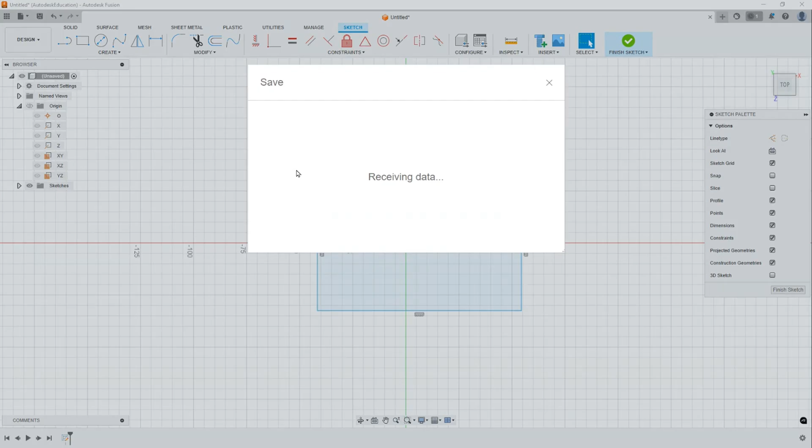So, if you hit R, it's actually rectangle. I'm going to left click here, and left click here. Again: R, left click here, left click here. I did not input any dimensions or values. Notice the color of this rectangle is blue, and it's actually loose. If I select this point or this line, I can move it around. Gets, sir, ma'am?

Later, we will be sharing more resources. I'm sure some of you have created designs in AutoCAD. You can reuse that, you can bring AutoCAD into Fusion 360. So, we've made a rectangle, and I'm going to hit E right away. What does E stand for? E is extrude.

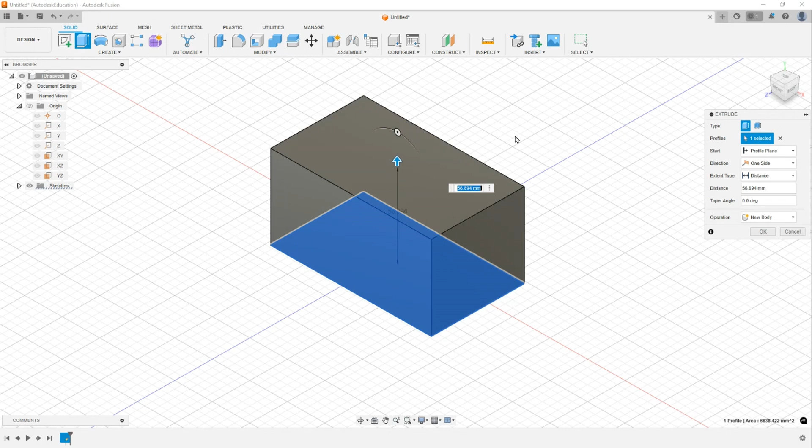Now it is asking me, notice it has an arrow, what would be our preferred distance or height of extrusion. No need to be exact, I just want you to create a box. Sa akin, 52, 59, 56, up to you. And then I'm going to hit OK. So as quick as that, we have created a 3D model from a 2D sketch.

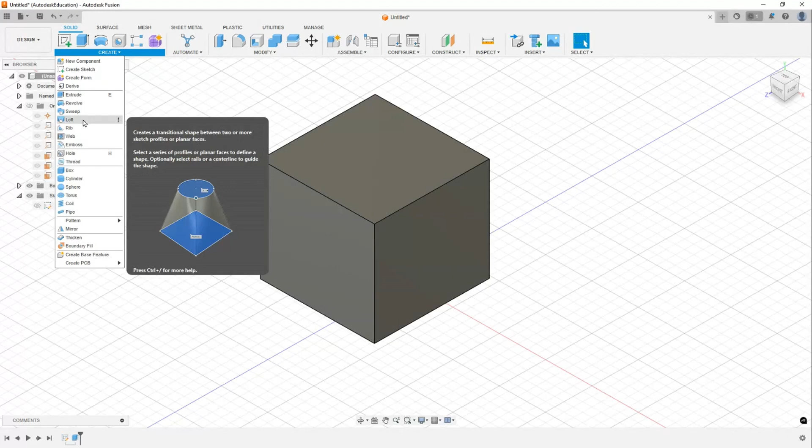Let me go over to our browser tree, right-click, edit sketch. This is the one from earlier. I will adjust this to this size and finish sketch. It automatically adapted. So again, we came from 2D to 3D. Most of the commands, extrude, revolve, sweep, loft, are all dependent on sketches. So, napakahalaga ng sketch.

For me, the definition of sketch is mabilis kang magdo-drawing. Mostly ganyan sa workplace: the boss draws on paper, gusto ko ganito, this size, these dimensions. Then it's up to you as the designer how to bring that into the CAD software. So stick to the definition that sketch is mabilisang pagdodrawing. What I showed you earlier all began with the sketch, then we extruded it.

Okay? So, next. Yes, Sir Ronimar. Thank you for joining us.

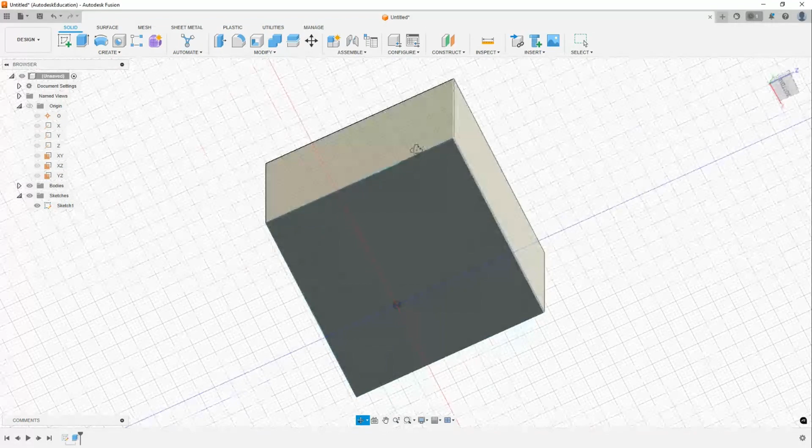So, next, paano ba siya, how do you rotate, pan the object? Okay, so actually, it's the same as AutoCAD. So, di ba, if I roll the scroll wheel, sobrang layo na niya. And if I double click the mouse wheel, it zoom extends. If I hold the mouse wheel, I am panning the model. And if I shift and hold the mouse wheel, I am rotating the model.

Okay? Shift and hold the mouse wheel. I am now rotating the model. And I want you to also pay attention to the upper right. So, let's just call this Bahay ni Kuya. So, if I select Bahay ni Kuya, it reverts to a standard isometric view.

Also, very prevalent among Autodesk softwares is the view cube. So, in 3ds Max, Maya, AutoCAD, Inventor, this is very familiar, the view cube. So, if I want to view the top view. I can also select this curved arrow to rotate the model. Select these small triangles. Go back to home view, select this corner or this corner. So that's another way of rotating our model.

So I would like to give you a few minutes. Sige nga. Play around. Be familiarized on interacting with the model. Okay, so hoping you are familiar na.

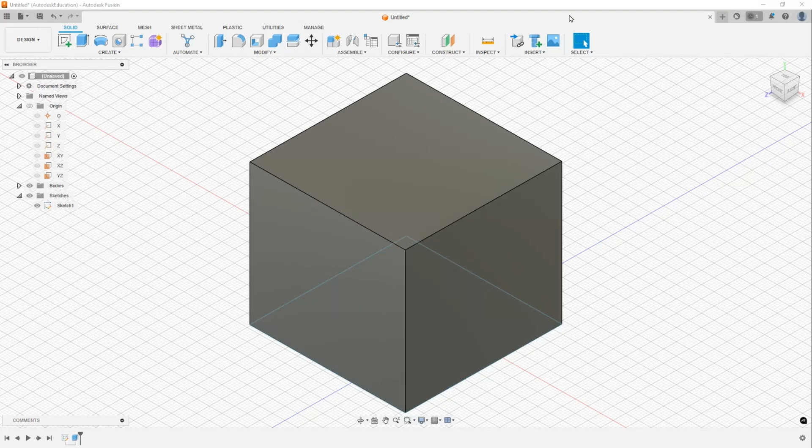Next one naman. I want you to hit Control N. This time, I want you to be familiarized naman with constraints. Okay, let's start slowly. Guys, I want you to select Create Sketch. Sa mga nagfa-follow along, I want you to select Create Sketch. So, kanina, we hit R, and it goes directly to sketch mode. So, this would be the basic way. I selected Create Sketch on the upper left.

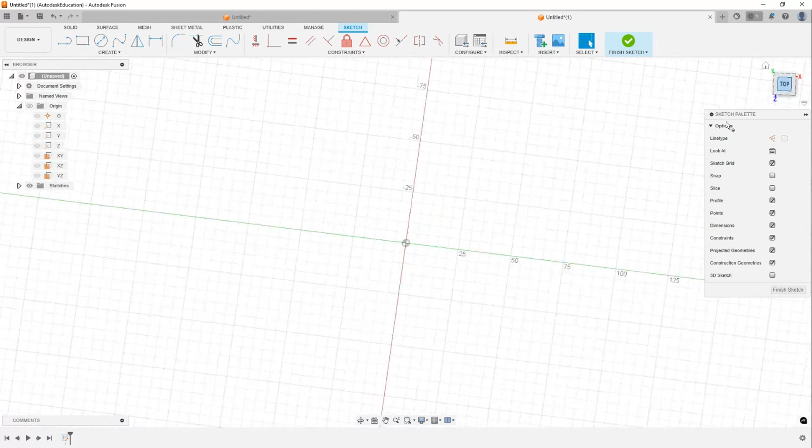Ngayon, tinatanong niya, saan natin gusto magsulat? So, for me, I prefer sketching again on the XZ plane. XZ plane. Okay? XZ plane, guys. So I'm currently utilizing the view cube to go back to my preferred view. Okay.

Next, ito sunod na gagawin nyo guys. I want you to hit L. Okay, I want you to hit L. So L stands for line.

Also, before we begin sketching, another preference. I want you to disable dito sa grid and snaps at the bottom. Personal preference lang naman, or of course, depende sa design situation. I want you to disable snap to grid and incremental move. Snap to grid and incremental move.

Okay, hitting L again for line. To disable line, of course, same with AutoCAD, L, escape. Line, I hit escape to get out of that command. So L again. So I want you to create a line here, left click, left click, left click, left click, double left click. Sige nga. Again. Left click, left click, left click, left click, double left click.

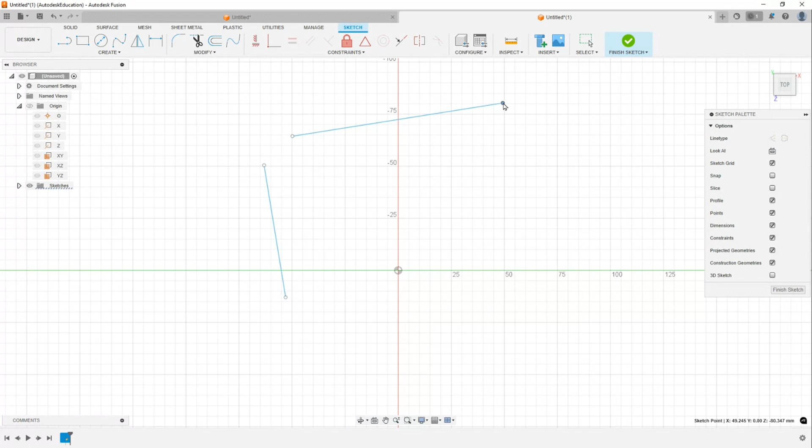So now, etong line na to guys ay wala pang constraint. Pero if we go near to a certain position, tingnan nyo, nagsasuggest siya ng horizontal constraint. So, ibig sabihin, na-apply na dyan yung horizontal constraint. So, pag minumove ko siya, Sir James, Sir Sean Kevin, siya ay perfectly horizontal na. Pero to remove that constraint, I can select this constraint, hit delete. So, pwede na ulit siyang diagonal.

Okay? So, reapplying horizontal, vertical, discover natin to. So, ito naman, because this is leaning towards vertical, if I apply a vertical constraint here, automatic, magiging vertical siya.

Ayan, di ba? So, alam na natin na ang horizontal vertical constraint ay also applies to lines. So, as we progress, madidiscover nyo na hindi lang pala na-apply ang constraints to just mere lines. It can be applied to other entities as well, object entities, sketch entities.

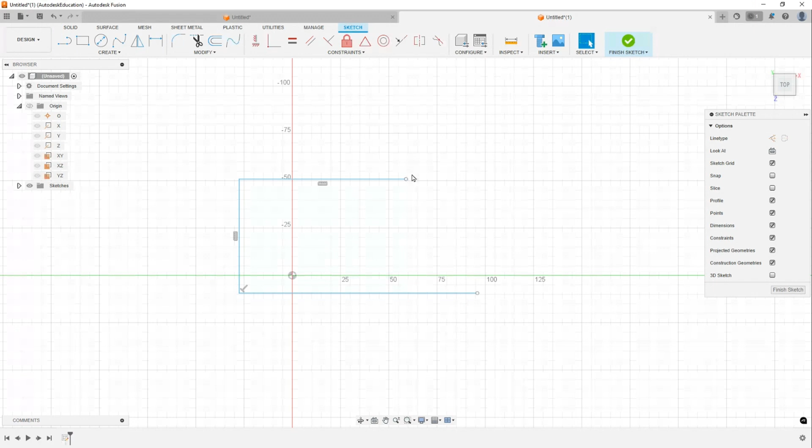So next, I want you to create another line. Dito naman. From this end point to this point. Okay? Ayan. Ito yung ginawa natin bagong line.

Ayan. Hi, Sir Jericho. Hoping you are following along.

Okay, so gumawa ako ng line. Nakadikit, guys, ha? Nakadikit. It's coincident. Next, I want you to select equal. Ayan, I have selected equal. Selecting this line, tsaka this line. So, ang ginawa niya, di ba? These two lines are now equal in length. Okay? Equal in length. Next, I want you to hit C naman. Circle. Gawa nga tayo ng circle dito at saka dito. Ayan.

Ayan. Sir Jericho, pakigawa nga din to. Ayan. Thank you.

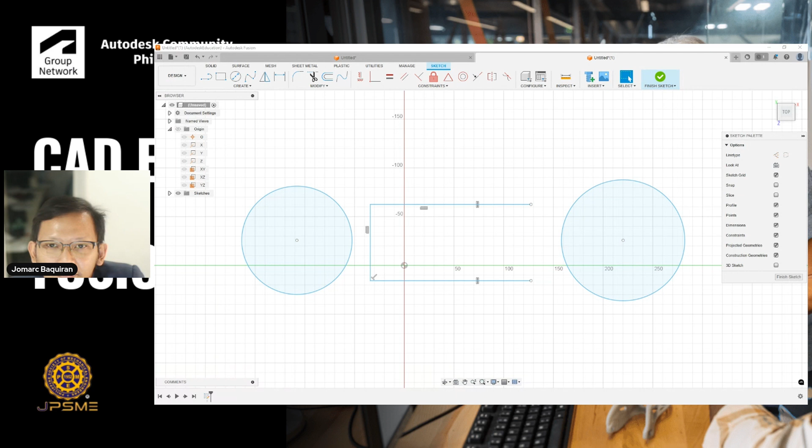Ayan. So, ito na yung current status ng sketch. Meron dalawang circle, tsaka itong 3 lines. Okay?

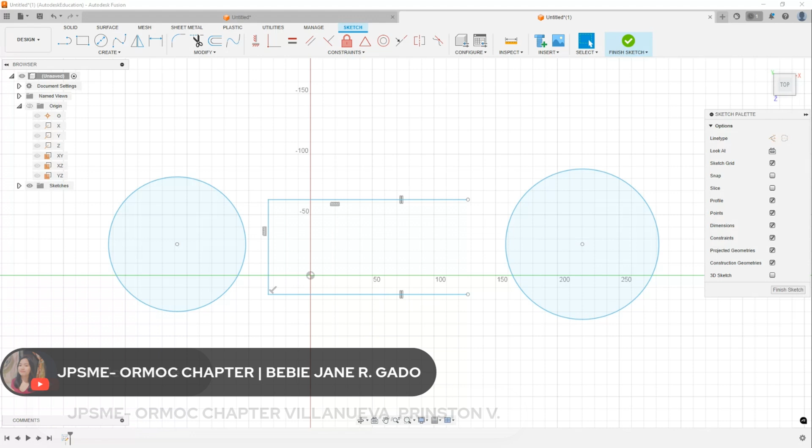Okay, going back. Kanina, 'di ba? Inequal natin tong dalawang line na to. So, hindi lang siya, of course, lines, 'di ba? We can also have these 2 circles equal. So, selecting equal. Selecting the circumference and the circumference. So, equal na siya, 'di ba? If I resize the diameter of the circle, dahil equal sila, so pareho. So it also applies to arcs, lines. Pag sinelect mo equal, magiging equal na sila, pareho. Okay, gets? Gets.

Next, parallel, of course, obvious. If I create another line here, di ba? Ito, line there, tas line din dito. I want these 2 lines to be parallel with each other. So, selecting parallel. Selecting them both. So, parallel. Diba? So, kung mag-extrude ako ng bubong, gagawin kong parallel yan. Ito, tsaka to. Parallel. Okay? Gets what parallel is? Yep.

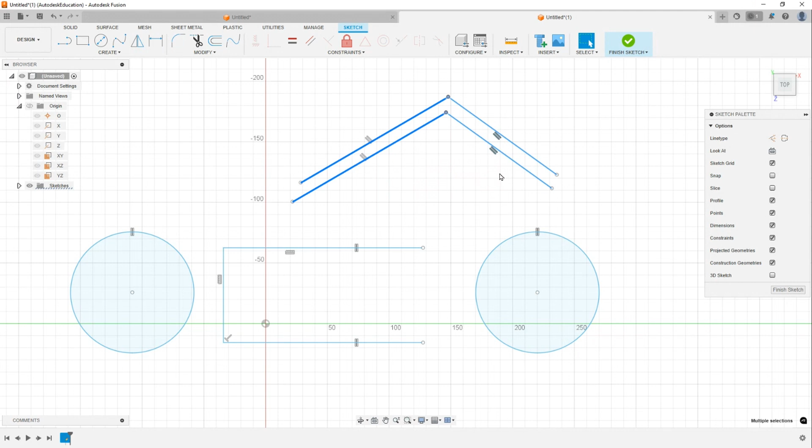Okay, next, perpendicular. Of course, ano ba yung nakikreate natin na angle pag perpendicular? It's obviously a 90 degree. So, kapareho dito. Although, etong dalawa na to ay walang perpendicular constraint. This is actually perpendicular too. It just so happened na nag-coincide yung dalawang perfectly horizontal and vertical entities. Pero dito, it was applied. So, there are instances na pwede ka makapag-create ng perpendicular na situation, pero hindi perpendicular constraint ang ginamit mo.

Okay? So, again, creating another line here and then applying perpendicular. Ito tsaka ito. Of course, the angle created here is 90. Ayan, perpendicular. Gets? Okay. So, fix, of course, finifix lang naman yan. Depende ulit sa use case, but mostly this is not utilized.

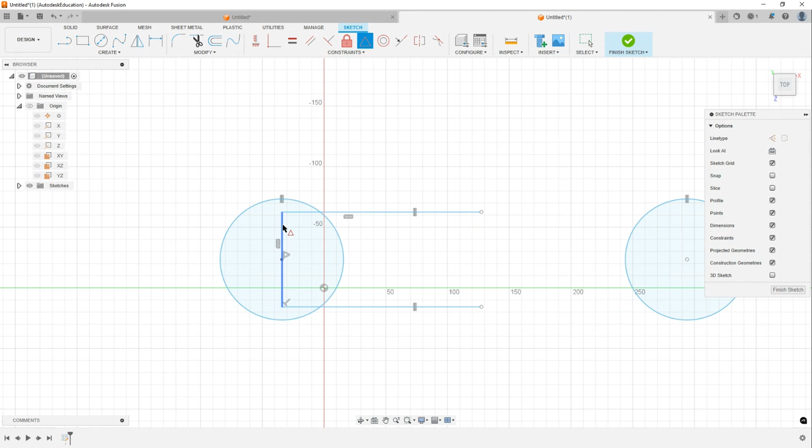Midpoint. Okay, midpoint naman. So, ang next intent ko is I want the center point of this circle to be at the midpoint of this vertical line. So, selecting midpoint, notice po itong center point na to mapupunta sa midpoint ng vertical line na to. Hitting escape. Ayan. Nasa midpoint.

Same din, kunyari. I have a line here and I want this endpoint to be at the midpoint of this line. So, selecting midpoint, selecting this and this. Diba? Tinuhog na niya yan dun. At the midpoint. Of course, indicated by a triangle.

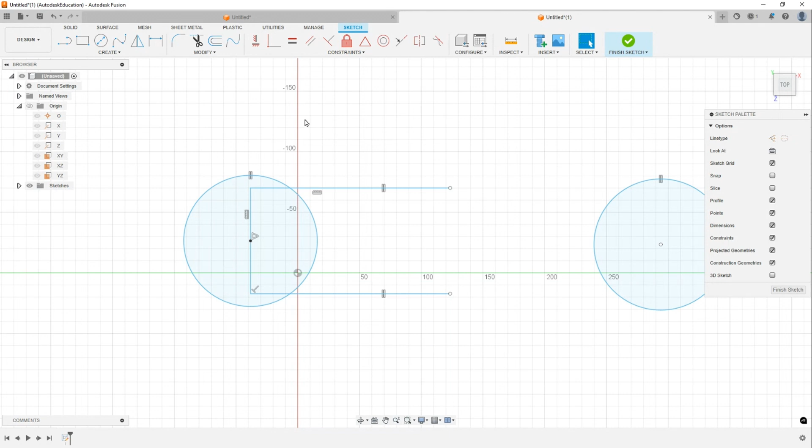Ayan. Okay, midpoint. Diba? It's simply the point going to the midpoint. In this instance, a line kanina. Okay. Ngayon, I want this horizontal line at saka itong circle na to. Diba? I can also select coincident. Select nyo nga to, guys, tsaka itong end corner point na to. Yan, corner point na yan. Select ko yung circle tsaka itong point. So, actually, ang another effect na nangyayari dito ay tangent na siya. Ayan. So, pinagdikit natin guys, ito na yung status ng ano natin.

Next. Line. Isara na natin to. I want you to create a line from here all the way here. Double left click. So, yan na. Okay. Next. I-midpoint na rin natin. Diba? I-midpoint natin tong center point at saka tong vertical line. Center point, vertical line. I selected midpoint.

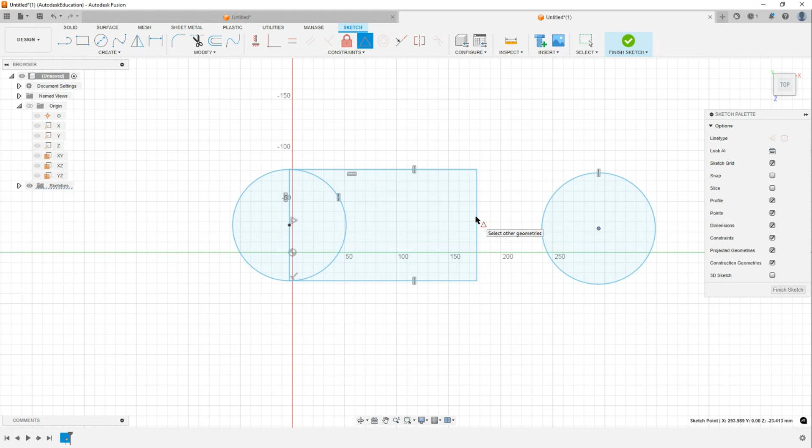Ayan. Sir Noren, are you following along? Sir Noren Kalika. Hoping you are following along. Okay.

So, gets? Yan ay nagawa natin. Let's create another circle nga, mas maliit. Ayan, I created 2 circles po. On the right, on the left, mas maliit. So, next naman ay, let's discover concentric. So, pag select ko circle na to, at saka circle na to, diba? Actually, the effect is both of their center points ay naging coincident. So, concentric, selecting this, tsaka this. Again, concentric, selecting this and this. Selecting the 2 lines. So, ito na yung current status ng ating sketch.

Okay. Angel May Rosalejos. Message mo rin ako, ma'am, ha, sa FB. Okay.

Next, collinear. Gawa ko ng dalawang line dito. Ayan, collinear. Okay, so selecting collinear, applying collinear constraint to both of these lines. So, ginagawa niya simply collinear, pinagpapantay, di ba? Okay? Collinear.

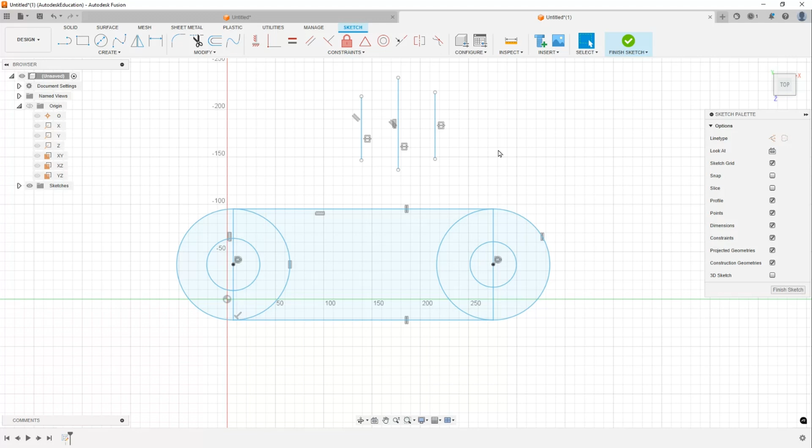And lastly, symmetry. So, gawa ko ng vertical line here. Double left click, double left click, double left click. So, when it comes to symmetry, ang first step dyan, select natin itong dalawa na nasa labas. Kasi, my intent is to have the last selection to be the symmetry line. So, if I move this, parang equal din siya, guys, diba? They are symmetrical. So, same distance from here to the symmetry line. Okay? So, there are instances na may i-revolve kayo. You will utilize the revolve feature. It can be possibly through a symmetry constraint.

Delete ko na, ha? Next, my next question is, nasaan ang geometric center ng ginawa natin na to? Hindi ba actually yung pinakagitna nito nandito? Nandyan, somewhere dyan. Tapos, ang ating 0, 0, 0, ang origin natin ay actually nandito. Ayan, I turned the visibility on. So, I want you to be in the habit na, as much as possible, if symmetrical yung ini-sketch nyo, ilagay nyo sa gitna yung geometric center, i-coincide nyo with our origin. So, ito yung origin. Which means, i-move natin tong sketch na to papunta dito. Coinciding with our center point. Yung X, Y, Z.

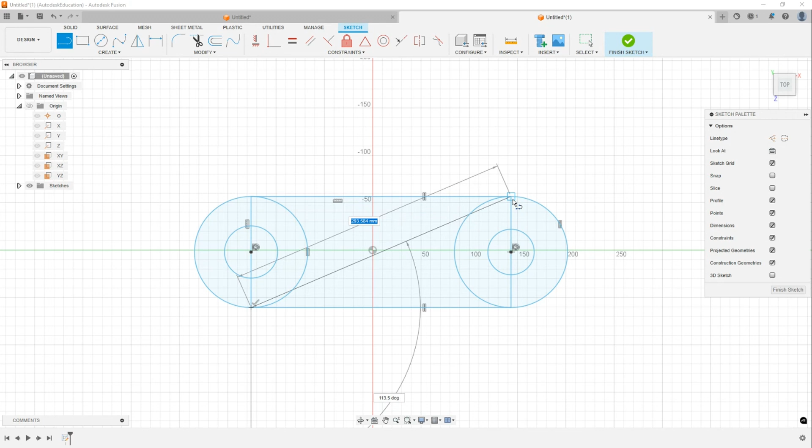Okay? Ngayon, the next step, paano ba natin gagawing gitnang-gitna? Perfectly at the center. So, one way I am seeing is I'm going to create a line from here to here. Tapos apply ako ng midpoint. Midpoint neto coinciding with our origin. So, gitnang-gitna na, diba? Okay?

So, delete ko siya. Another way is, select ko yung horizontal, vertical. I-hold ko yung shift. Guys, again, i-hold ko yung shift. Nag-hover ako sa horizontal line. Nasa horizontal, vertical constraint tayo. Pag in-hold ko yung shift, nag-appear yung triangle, diba? So, it designates this is the midpoint. So, holding shift, left click. Tapos, left click dito sa origin. Again, holding shift, left click doon, tsaka left click dito. So, sinasabi niya, yung midpoint at tsaka origin ay perfectly vertical na.

So, it is not applicable to lines only. We can do horizontal, vertical through points. We can align points horizontally or vertically. So, same din. I will reapply. I will grab horizontal, vertical, selecting this center point, tsaka our origin. So, we had the same effect kanina instead of creating a diagonal line. So, hindi ba mas malinis yung ating sketch ngayon? Okay?

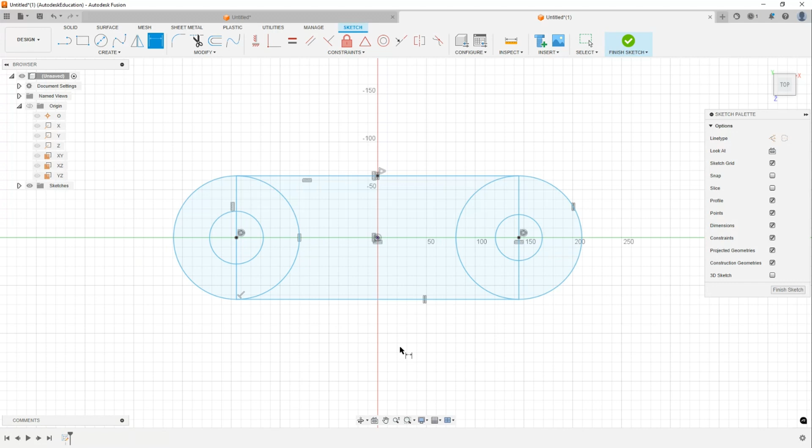Gets? Yep. So, next, diba? Let's apply dimensions. So, hitting D or dito sa upper right, sketch dimension. Select natin itong center point at center point. I prefer 100.

Ayan. Also, very important, diba? I want you to head over to your profile. So, this is my account. I'm going to Preferences, Design, okay? And I want you to enable this, scale entire sketch at first dimension. Enable nyo nga yan, guys. Apply, okay. Ayan. So, 100.

Next, itong outer circle natin na to, how about 50? So, kanina blue, diba? It now turns into black. How about this naman? To 25? Okay? And, hindi kasi natin na-apply yung equal sa dalawa na to. So, let's now apply equal to these two inner circles. Equal this and this. So, from blue, itim na siya.

Kasi we have defined the right constraints. And we have added values. We became specific to the dimensions. Ang gusto ko 100 to. Diba? Ang gusto ko diameter nito 50. Yung inner diameter nito 25.

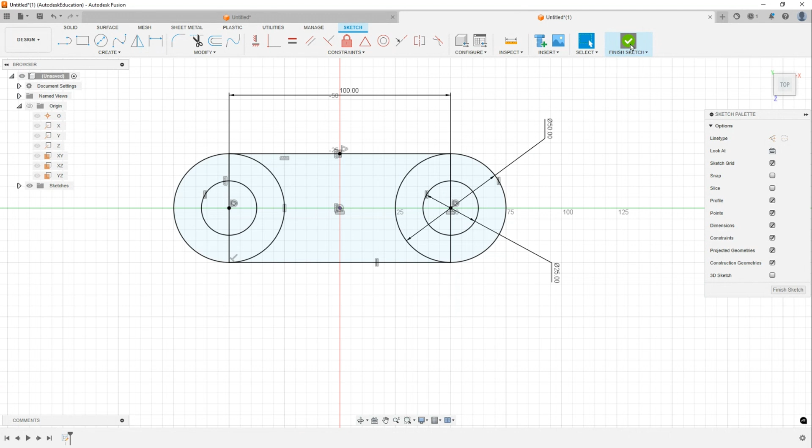Gets? Okay. So next, I want you to select Finish Sketch. Punta sa bahay ni Kuya. Select Extrude. Okay? Create a window selection. Tapos, I want you to select Symmetric. Why? I-maintain ulit natin yung position ng ating origin. Diba? So, if I head over to front view, ito yung ating origin. So, symmetrical, na-maintain na nasa gitna.

So, I want the whole length siguro 10. Ang thickness nito overall, 10. Ayan. So, thickness 10. If I select this edge, sa bottom right, nakalagay naman 10 millimeters. So, if ever iba yung units nyo, head over to Document Settings. Tapos, Change Active Units. Set this to millimeter. Although preference lang naman.

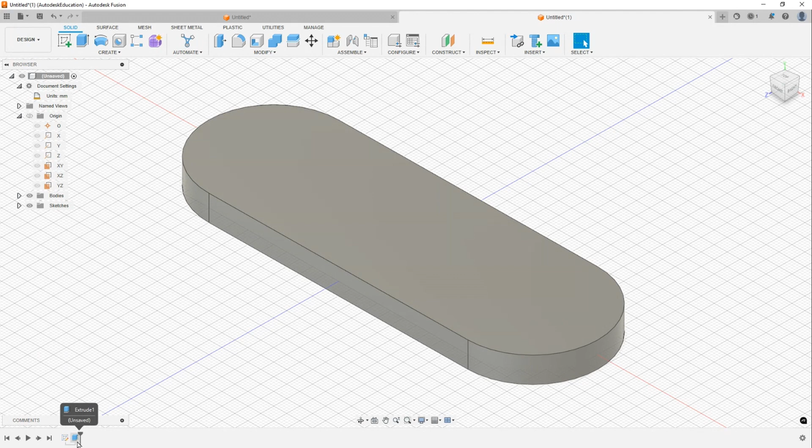Next, lagi naman sa design, of course, may changes, diba? It may be changes from the customer or changes from your boss, requiring you to revise this and that. Let's say there's a revision requiring us to put holes pala. So what we can do, head over to our timeline. Sa ilalim po, bottom left. Right-click, Edit Feature.

Tapos I want you to hit Control. Control left-click dito para i-remove yan. So 8 na lang. Kanina 9 tong profile selected. Control left click ulit. Control left click. So, may butas na siya. Okay? So, select okay. Sige nga. Ayan.

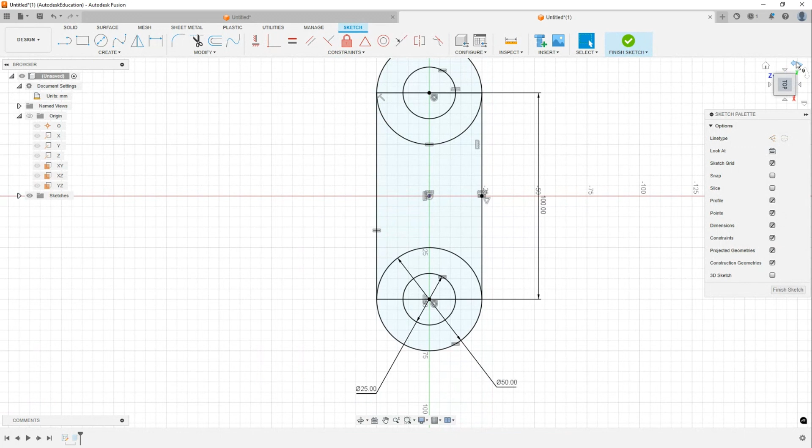Tapos, let's say, may update na naman. 'Di ba? Let me head over to Edit Sketch. I-rotate ko to, dito guys, sa may View Cube. Let's say, there's an update. 110 lang dapat daw, hindi 100. So, finish sketch. So, again, it automatically updated.

So, this is just a simple part, 'di ba? Hindi pa to complicated kapareho ng plastic part, plastic component. So, in the future, mas lalo na kung plastic, dadami yung mga features registered here sa ating timeline. So, for now, ang nakikita lang natin ay isang sketch at isang extrude.

Okay? So, I want you to screen capture. Ayan, snipping tool. I don't know ano yung sa inyo. I want you to screen capture this. Ayan, sige nga. Yep.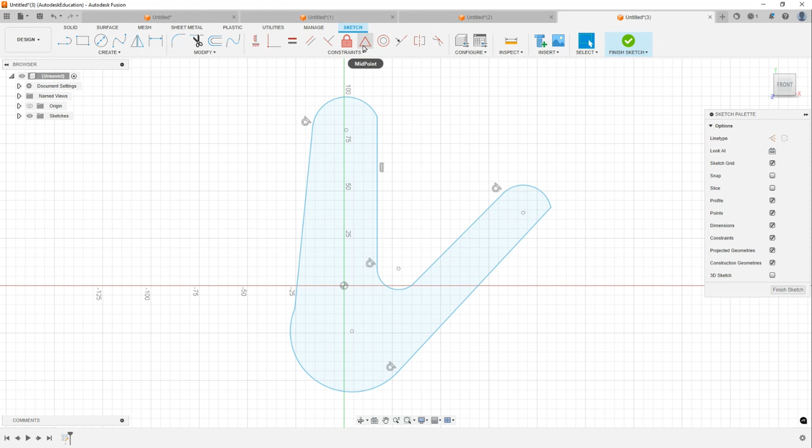So, of course, ito nangangailangan ng mga constraints like for this one. Ito obviously needs to be coincident. So, selecting these two points. So, dikit na siya. Notice itong may tangent constraint. Smooth yung transition ng line tsaka arc, which means I'm going to apply tangent din to this line, to this arc, to this line, to this arc, to this line, to this arc, to this line.

Okay? And actually, it has a construction line. Gagawa ko ng construction line from this to this. Double left click. From this to this. Tapos, diba ito? This one should be coincident with this point. So, coincident. Select ko tong center point na to at saka tong our XYZ origin. Diba? Move ko to. Resize.

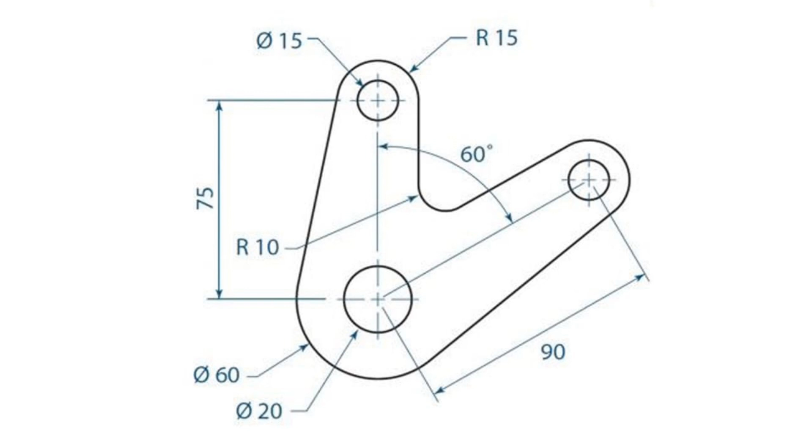Okay. Ito yung progress ko sa ngayon. Next, our fourth challenge naman. Again, requesting everyone to screen capture this. Ayan, pa-screen capture.

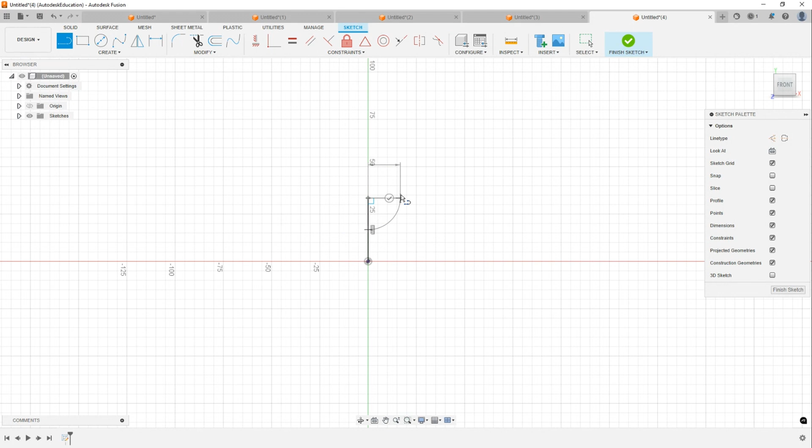Ayan. Okay, sana na-screen capture nyo na ang ating fourth exercise. So, ako, my interpretation on this is I'll be hitting R or L. L, sige, L. Again, going back sa ating definition ng sketch, mabilis na pagdodrawing. Release. Ni-utilize ko ngayon yung holding the left mouse button. Left click, double left click. Ayan.

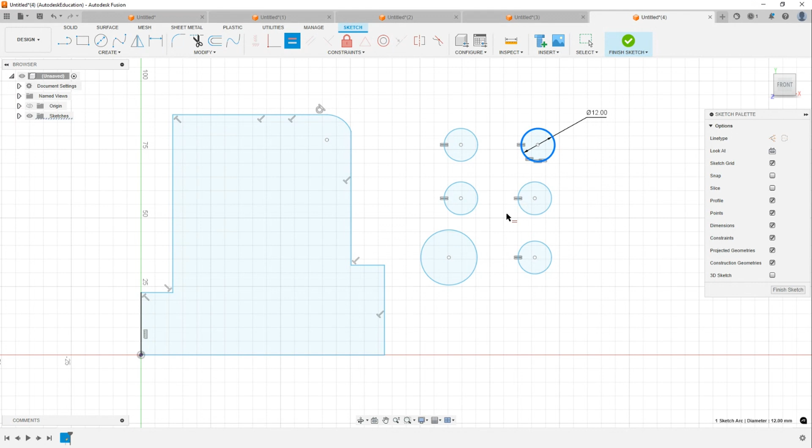Nanay, anak. Nanay, anak. Nanay, anak. So if this becomes 15, automatically mag-update din the rest. 20. Reverting back to 12. Okay? Yan ang attack ko. Of course, everyone has their own strategy. So this is just my personal strategy.

So next, I will apply horizontal, vertical. Pagpapantayin ko horizontally, vertically mga points nila, center points. Like for this, ito. Aligned na sila horizontally. Going back to horizontal, vertical. This center point, this center point. Of course, we need also to apply vertically. So, selecting horizontal, vertical. Ito.

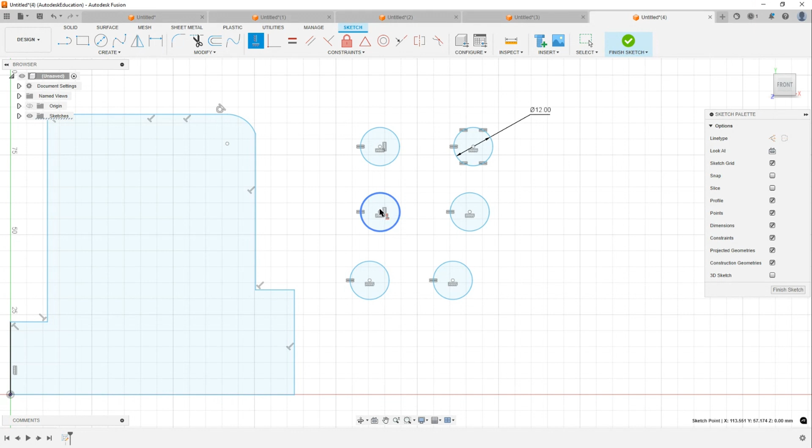So, if I move the circle, yung mga na-applyan natin ng relation or constraint, notice its effect. So, dito rin pala dapat. Left click, the center point, the center point, the center point. Tapos, eventually, pagtapos ko na yan, hinihimay-himay lang natin. Instead of doing this all here, nilabas lang natin.

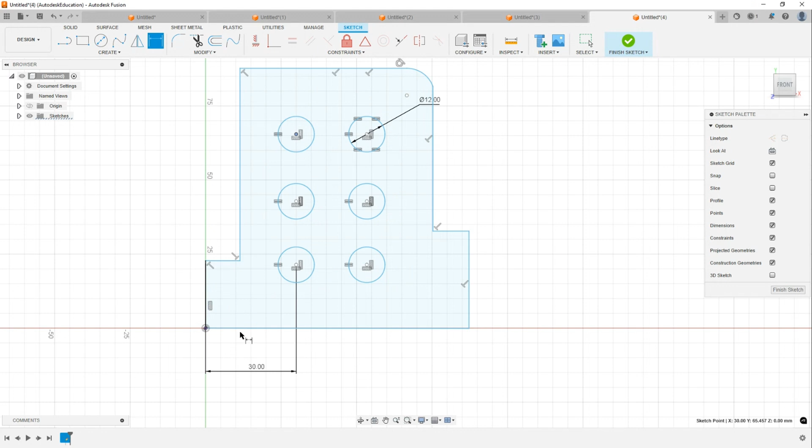So, kung tapos na kayo dyan, I'll be moving this naman dito. So, saka naman ako mag-a-apply dyan ng D30. Sabi dyan, 30. Tapos, ito, 65. This one to be 65. Okay, gets?

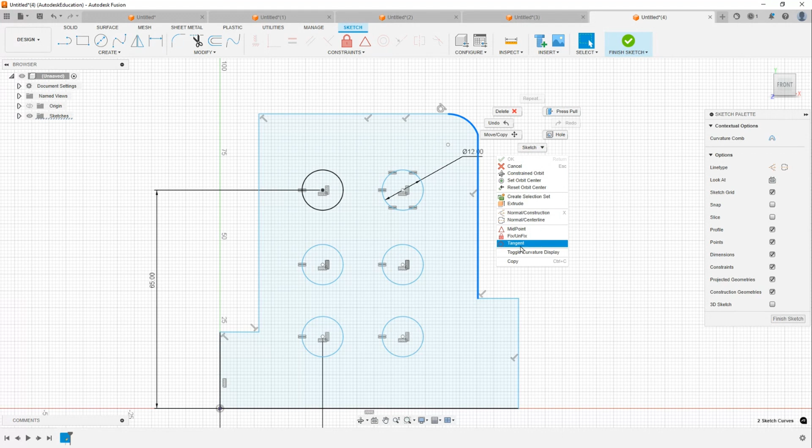Okay, the rest is up to you. Ayan. Actually, konti na lang kulang yan. Ito, lalagyan ko ng horizontal constraint. Ito, kulang siya ng tangent. Tangent. So, smooth na yung transition. Okay? Next.

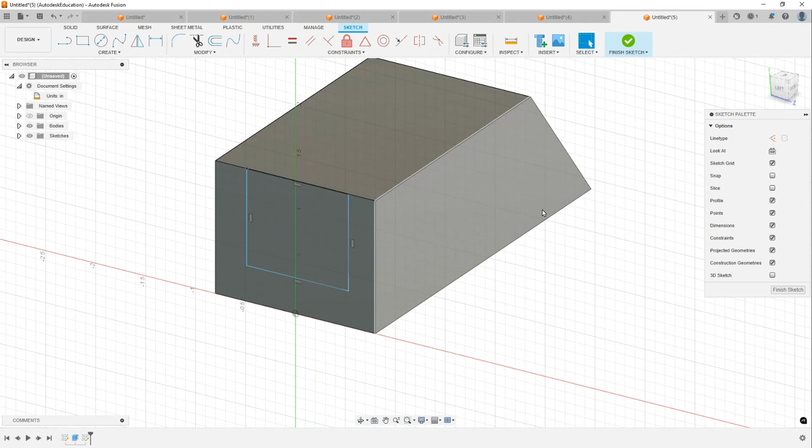Pero actually, dapat ito ay operation. Distance is through all. O yan. O ito yung version ko. Again, mali ito, wala siyang dimensions pa. So I want your version should have, of course, dimensions and constraints. Yan, dapat fully defined yan. Okay, gets? So, madali lang naman.

So, I can go back, diba, to the first sketch, edit sketch. Ano ba sabi dyan? So, dito daw ay 3.5, diba? This one to be 60. Diba? Ito daw, from here to here is 1.75. Finish sketch. So, notice, automatically nag-update siya. Okay? Again, showing you our activity 5.

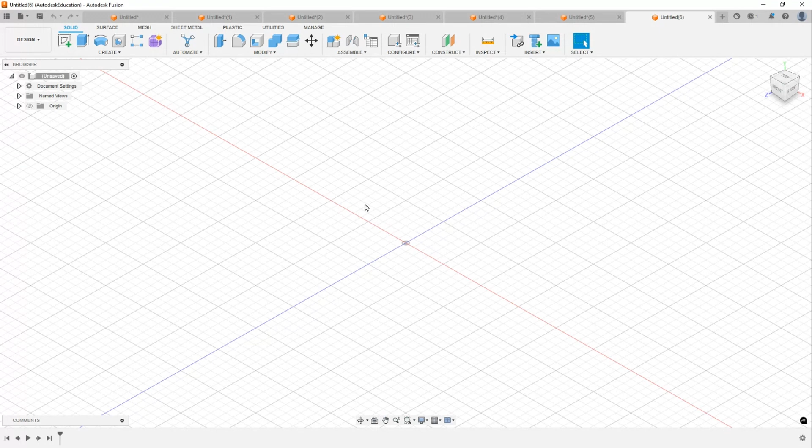Part 5. Okay, so my take naman on this, again, going back to the definition of sketch, mabilis ang pag-drawing. So, my take on this is I'll be using rectangles. Diba? Kung gusto kong gawin na mabilis lang talaga to, if this is a competition or something, diba? Extrude ko yan. Pull ko to. Select ko tong side na to, L. Create ako ng line from here to here. So, this is actually a profile na din. So let me extrude this.

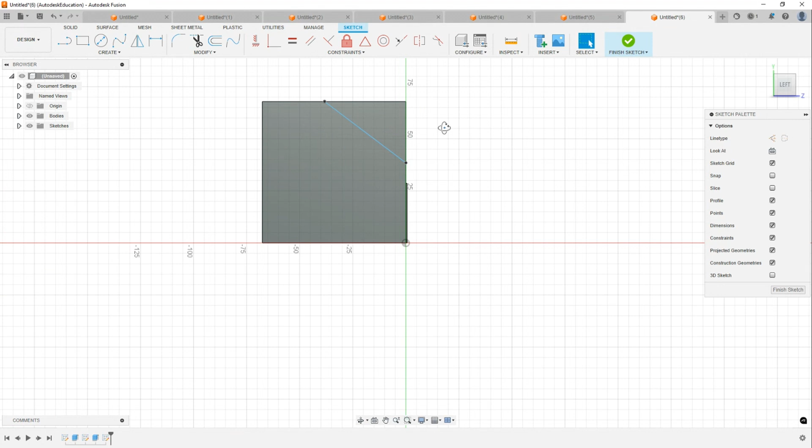Diba? So same din, selecting this face. L. Creating a line here. E for extrude. So mabilis ang sketch, mabilis ang extrude. I have created our sixth activity. Ayan. At ito yung version ko.

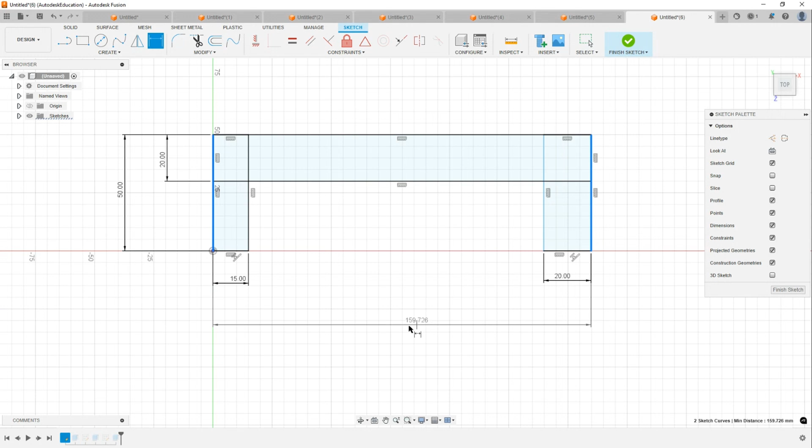Again, 'di ba? I'll go back to edit sketch to correct or to apply the right dimensions. Sabi diyan, ito daw ay 20. At ito daw, this one should be 15. This one to be 20. What else? C. This one to be 50. Ano ba yung C? Tama, 50, diba? Tapos, itong dalawa actually should be collinear. So, collinear constraint. And then finally, itong dalawa should be A, 110.

Finished sketch. So, notice, nag-update siya. But of course, I need to redefine kasi hindi ko pa nga nalagyan ng dimensions. Okay? So, ito yung version kong hindi pa tapos. Again, sharing this to FB. Ayan. So again, our second to the last activity. Ayan po.

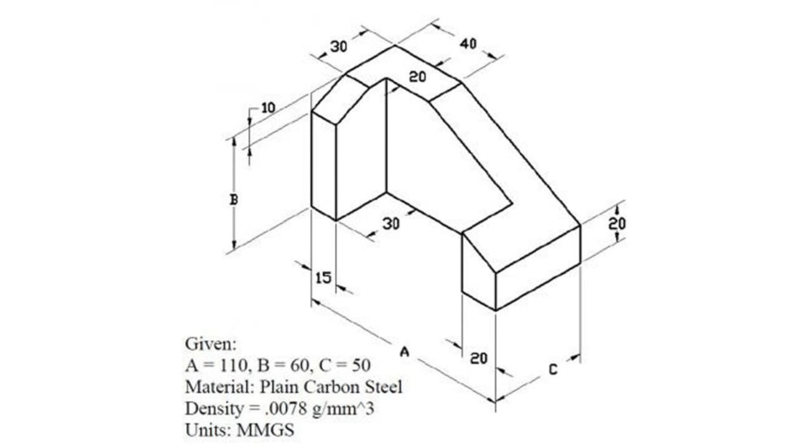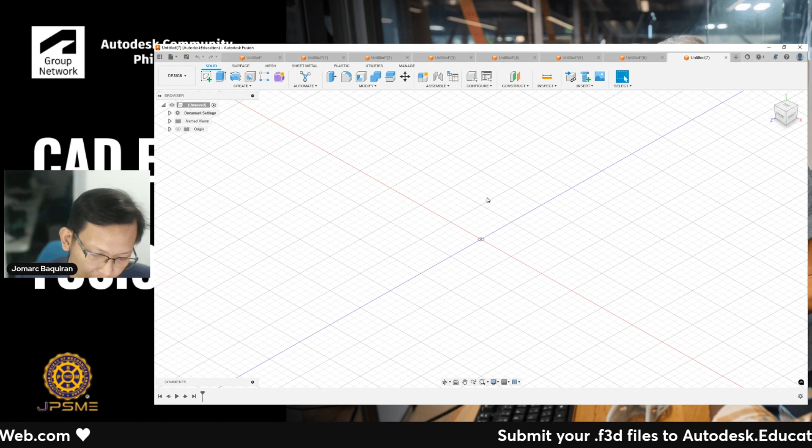Ayan, okay. So, for this activity naman, the camera, again, giving you the creative freedom. Kung ano po yung dagdagan nyo ng additional features. So, for me, my take on this is, gagawin ko munang center rectangle. 30 by, hit tab, 30 by 100. Hit E for extrude. The height is initially 50. Tapos, E ulit for extrude. Pull this up. 10 daw, diba? 10.

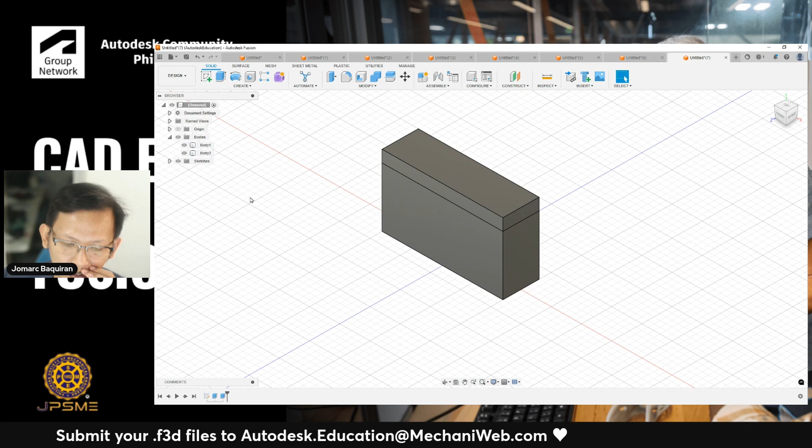But, under operation, ang gagawin ko, new body. Okay, so notice here, sa bodies, 1 lang ngayon. Operation, new body. Okay, so 2 bodies na. So, next naman, for the lens, I'm going to select this face, C. I'm going to create that circle here, which has a diameter of 50. Gawa na lang ko siguro ng line from here. Or yung technique natin, di ba? Eto.

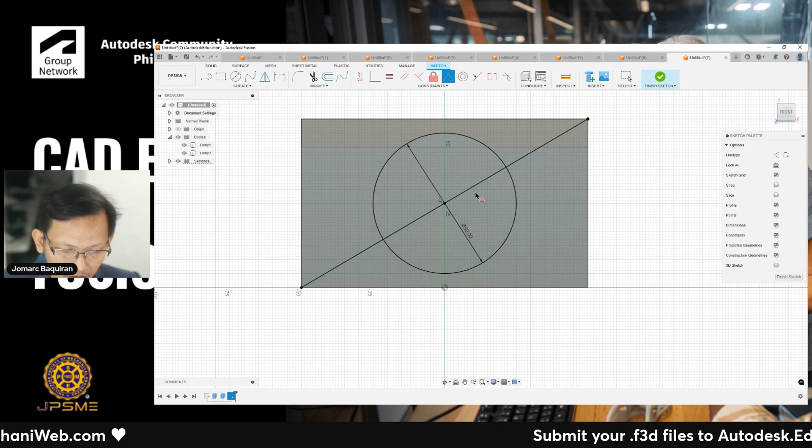Using vertical. Kaya lang, wala siya. So, I'm going to create a line from here to here. Diba? Or project this, yung point na yan. I-coincide ko siya dyan. Select this line, tsaka this center point. I-midpoint natin para gitnang-gitna. Tapos, turn ko to as a construction line. So, meron na tayong sketch, di ba?

E for extrude. 20. Keying in 20. Operation, new body. Okay. So, I'm renaming this to lens. To rename, left click, tapos, ayan, left click. So, body 2, lens. So, there's another one here, knob.

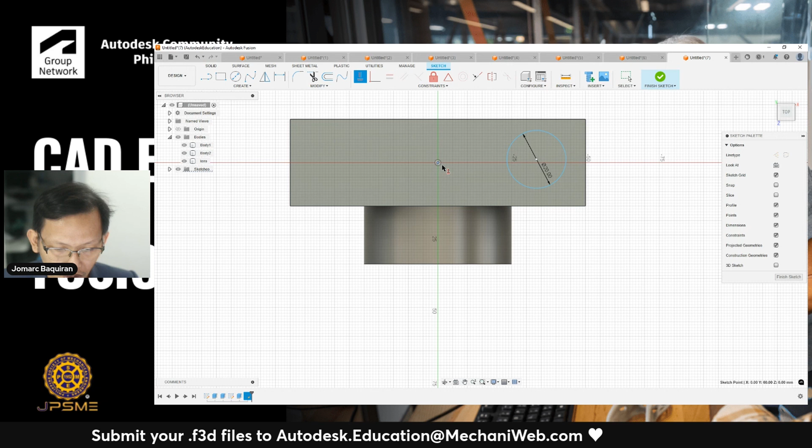So, selecting this face. Diameter to be 20. Align ko siya para gitnang-gitna, horizontally, with our origin, tsaka tong center point. D for dimension, 15 daw sa kantong ito. Tapos, there's a box, or E muna for extrude. Extrude this out as 5. Operation, new body.

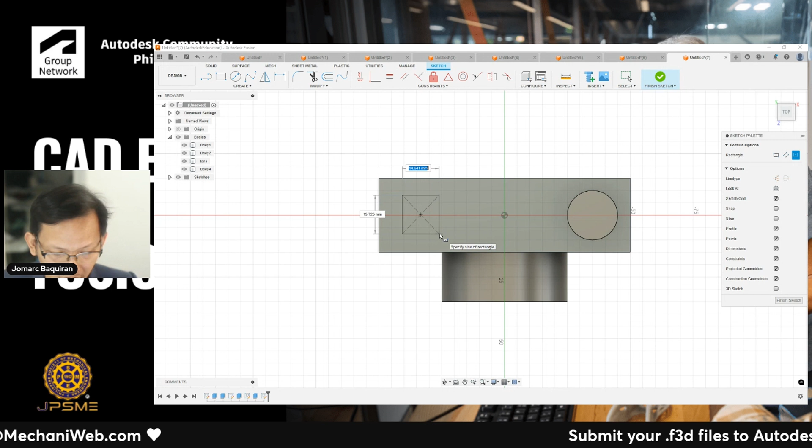Going back, nagkamali ata. Hindi ata 5. 14, 5. Select this face again. R for rectangle. Walang sinabing size ng square na to. So I think this is 15. Parang masyado malaki. Parang 10 lang siya. 10. Hit tab, 10.

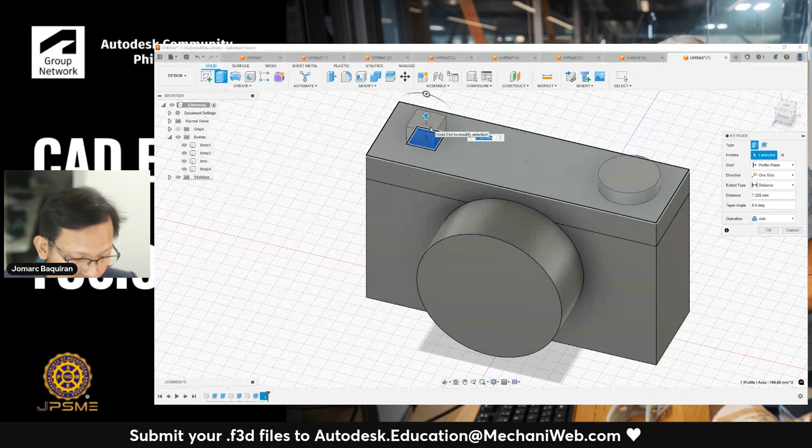Tapos 15 daw mula dito hanggang dito. Hindi. I think this is the 15. Ayan. So, gumagalaw pa to. This is not aligned. So, let me align this horizontally with our origin. Ito, tsaka, ayan. Itim na. Hit E for extrude. This is also 5. Again, operation, new body.

Okay, let me rename this as button round. Button square.

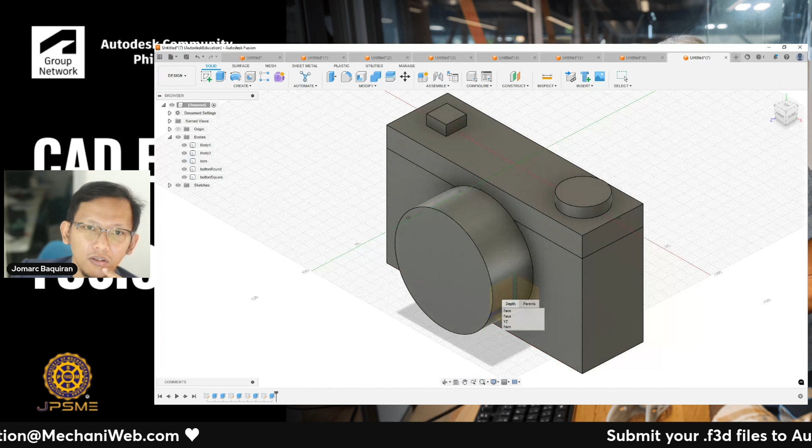Okay? So for the viewfinder, I'm going to hit L. I'm going to sketch dito sa YZ plane. But of course, if I hover around, I'm going to be selecting this cylindrical face. So I'm going to hover over the target plane, left click and hold. Again, diniin ko po, left click and hold. Then selecting YZ. So from here, I can slice this and create that viewfinder L.

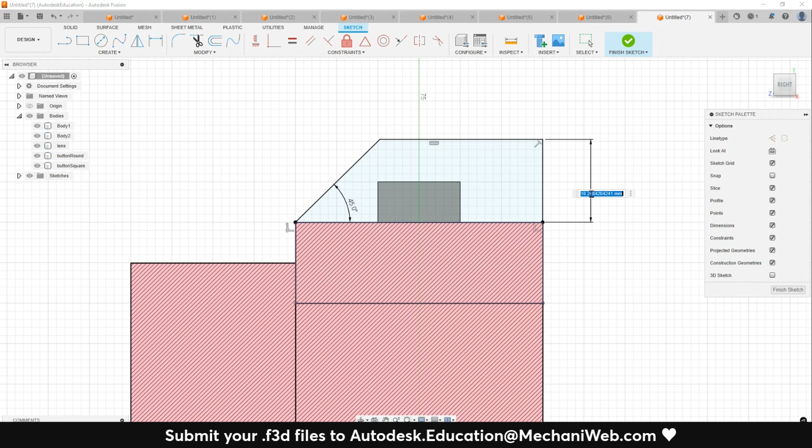Ayan. So, P for project. Let me project this body, para may mai-coincide yan. So, nag-bluish color siya, which means this is now a profile. So, keying in 45. This one to be 10. Turning off slice. Hit E for extrude.

And of course, dapat symmetric. Again, symmetric. Operation, new body again. Tapos, overall length is 30. New body. So, as quick as that. Here's my version. And of course, I want you to have the creative freedom again to apply additional features. But this is just the baseline.

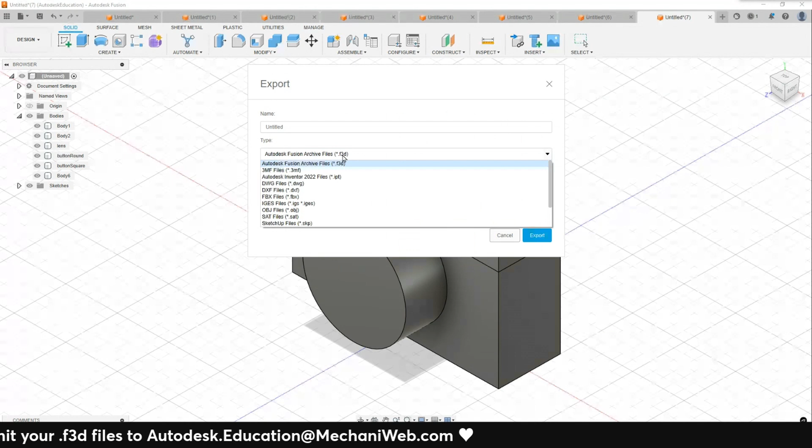Okay, so to export the files, File, Export. So ako, isi-save ko siya sa local drive ko. Ayan. So for example, itong camera, .f3d guys, type. Control V, camera. Export. So, ito yung file na niya. .f3d for Fusion 360.

Okay, so we'll be waiting for your works this day or later this evening. And on top of that, as your additional assignment, we will be giving this for free para ma-master nyo yung 2D sketching. We will be requiring you to recreate these 10 2D drawings. Medyo mas mahirap to ng onti lang, para ma-master nyo talaga yung pag-a-apply ng constraints. Lahat po na nag-register will be enrolled here for free as a bonus. Again, our intent is for you to learn, and sana magamit nyo itong knowledge na to pagdating ng thesis nyo, and possibly your own freelance work.

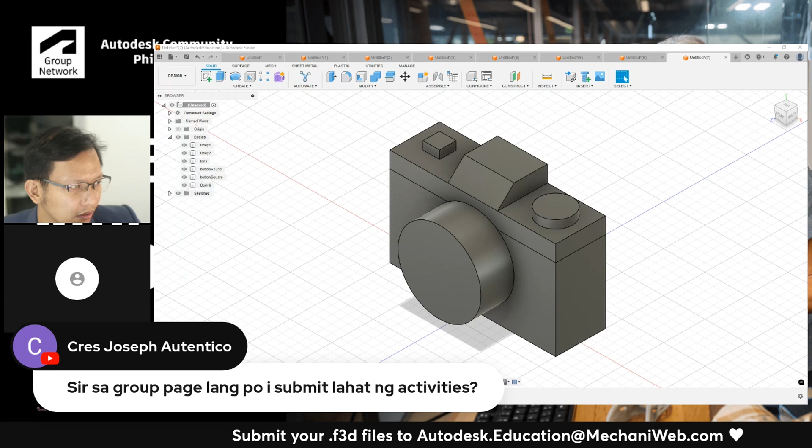Like for this one from Sir Joseph Autentico: sir, sa group page lang po submit lahat. Yung mga currently participating, paki-paste yung mga gawa nyo sa page. But for this day, we will be waiting for your submission at autodesk.education@mechaniweb.com. Diyan nyo po ipadala yung mga files, .f3d. Attach mo or i-zip mo. Maliit lang naman yung file. Let me check. Our camera kanina is just 88 kilobytes. That's how small and light it is. Kaya yan, sir, sa email.